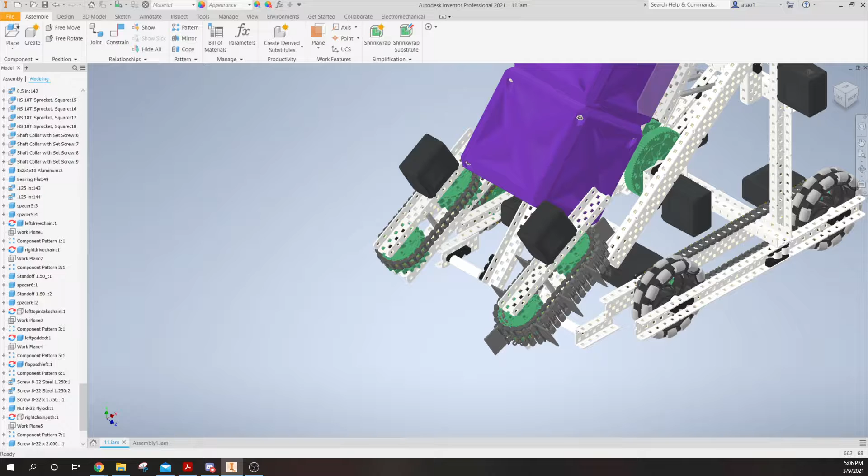Right, so today our objective, we're going to finish the other side of the intakes first. That'll take roughly 10 to 15 minutes. So we'll get started. First we want to make a part.

So right chain, and then we can start the drawing where we want it to be, on this surface, because we're putting it on these sprockets. So that's what we want to do. Then you click Start 2D Sketch and click the correct plane that we want to draw on. So this one.

Okay, and then we remember that we have to do project geometry and construction lines to get the centers of these two circles. So we can just do that. And then with these geometries established, we can draw directly on the CAD using those center points.

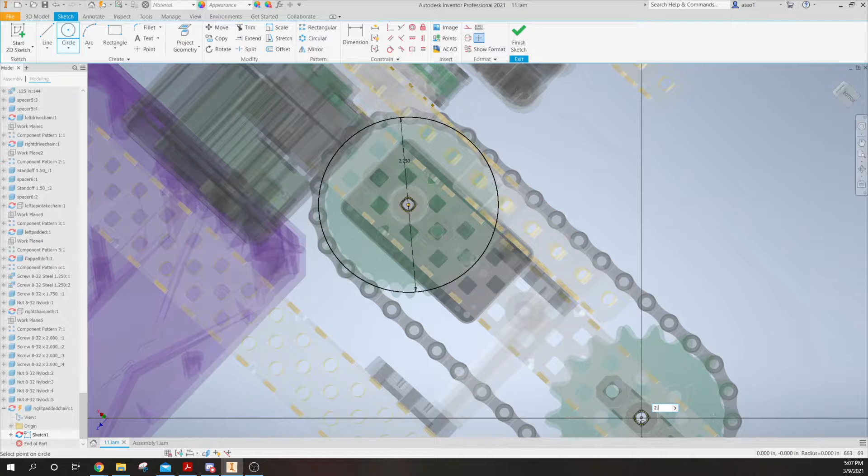And then we're basically trying to draw the chain path right now. So we need some sort of elliptical shape. So we're going to need two tangent lines across here. Notice how they're not tangent right now. That's because we're going to make them tangent by using the tangent tool here. So that's why it doesn't matter where you put the lines initially. And then finally you trim off these ends, so you just click on trim and trim these off.

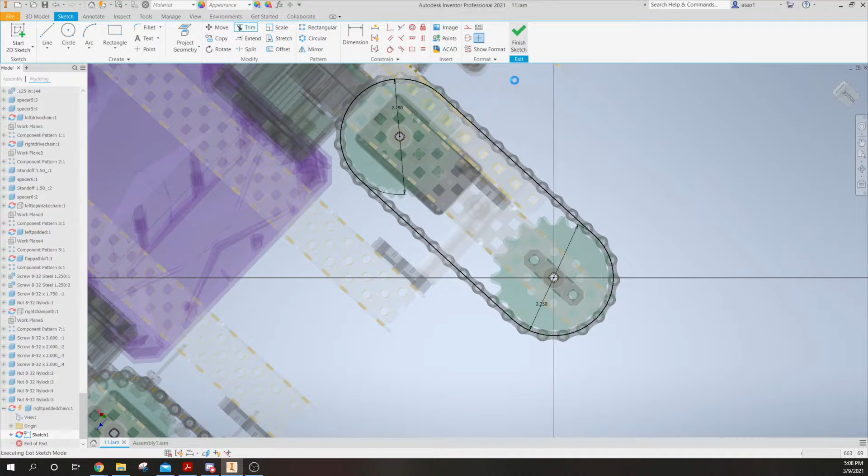Alright, then you want to add a work point, right. So we can start one right here. Actually, no, I don't like that. We're going to start one right here.

Right, and then we're going to pattern this around the chain. So we click on this point, click on this, and then select curve length, which is the length of the curve, and you divide it by 0.386, which is the length of each individual chain. And then we click these two radio buttons and apply. We see that our work point gets patterned nicely across the whole entire chain.

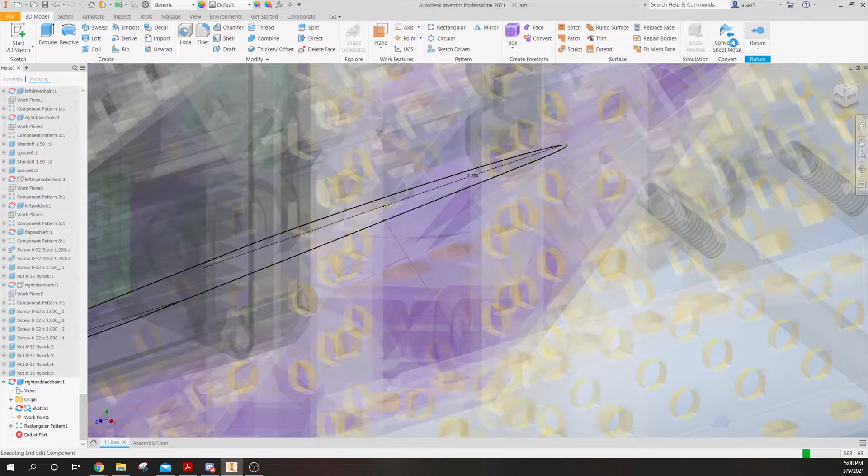And then we're going to turn the sketch back on because we're going to need it later. So with that done, we can first CAD the padded tank treads, which are these things, these links with pads on them. Not the flaps, we're going to do that right after.

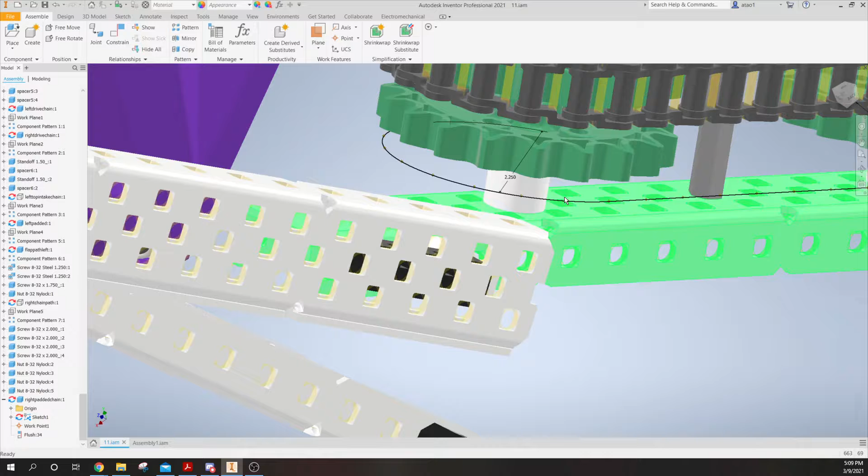Okay, so we're going to remember where our point was, which is about somewhere here, okay. And now we want to bring in a padded tank tread. So, chain and tank tread traction link. They're also called traction links because they have pads on the surface that grip surfaces really well. And this is exactly what we need.

We need to make a plane here so we have a surface to constrain everything to, or all the chain links rather. And we're going to use this plane right now. So if we go into the part in the bottom left here, we can click on origin and choose the XY plane and constrain it to the work plane we just made so that it's nice and in line.

Right, hello. And then we're going to have to constrain this padded link to our first point. So we're going to click on, oh wait, these are the old links, my bad, okay. We're actually going to use a link from the new library. I used my old library. So we're going to use library 1.2 because they have something counted for us that's useful.

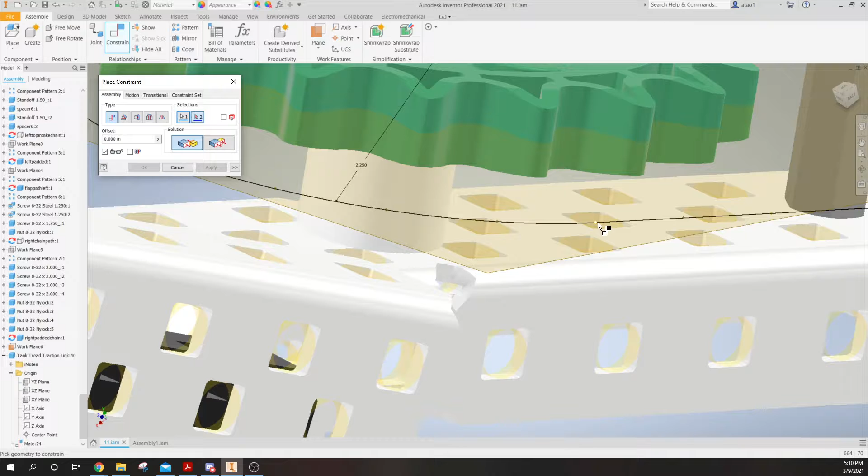So if we go here, you find the exact same things. They have this little orange thing going through the middle, which is important for our second constraint. So I'm just going to redo the first constraint. Boom. And then we need this axis, and we need to constrain it to the first point that we made here. And then you click apply, and then your chain link's kind of like this.

We need one more constraint. We need to align it with the chain path. So you click the XZ plane and the chain path, and then you set it to either 90 or negative 90. You're going to have to try both. And if it's wrong, like this one, you just switch it to the other one. So you can edit the constraint down here, and boom.

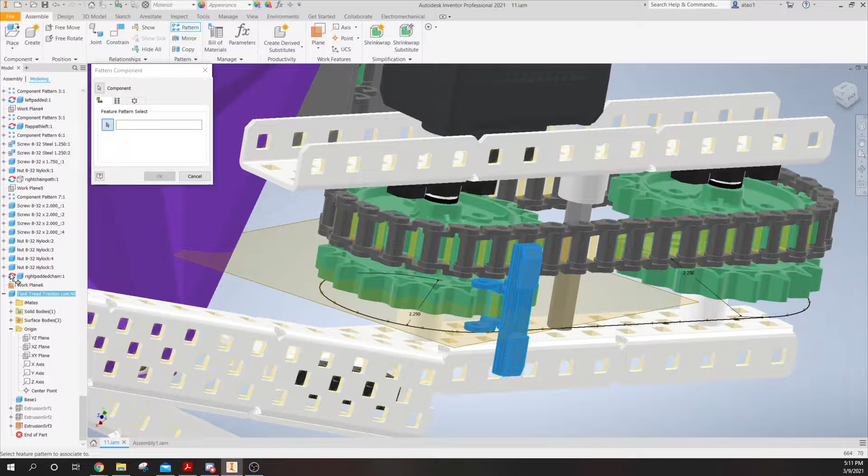And if everything's done properly, it should pattern itself nicely around the whole chain once you click on pattern components and you click on the feature pattern. I'm going a bit fast because it's covered last week and we have some other things to cover today as well. So yeah, and then we need to find the path which we made in right padded chain, and boom, if we click it, you see how it patterns itself really nicely around.

This is exactly how you would do it in real life as well. So if you're building this in real life, this is how your rollers would look. And now let's get rid of all these sketches with all those numbers so it'll look nicer. So yeah, that's the padded stuff.

Now, what about these flaps? We're going to have to add those in somehow. So let's do that right now. In principle, it's literally the exact same process, except notice how they're all spaced out a little bit more. That means we have to specify some different numbers, but all in all, it's pretty much the same.

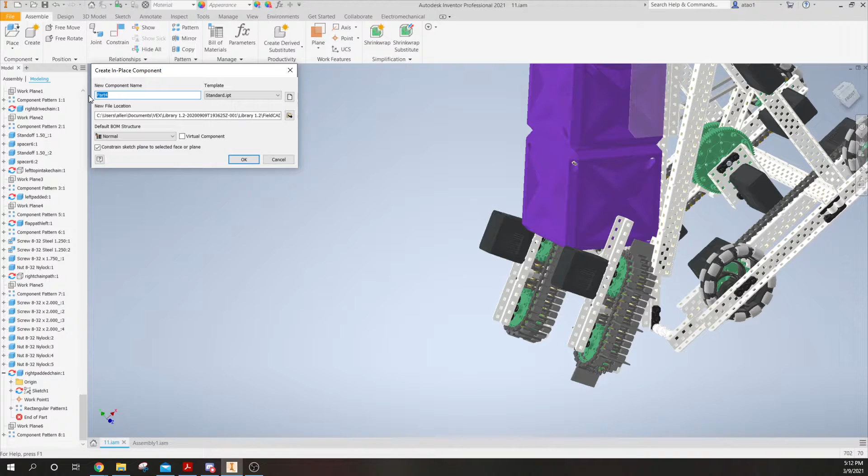So we're going to name this right flap path, I guess, and do exactly what we just did before with a small twist. So we go to the surface we want, start 2D sketch, and find the correct plane.

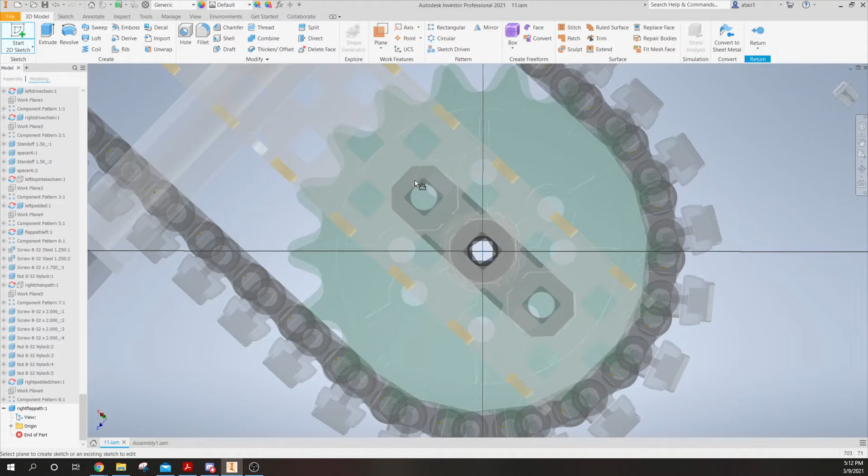Now we're going to do the same thing: project geometry, construction lines, and we're going to find the center points of both sprockets. And then turn off construction lines so we can draw in our circles.

The circles are roughly just the size of the teeth, or goes right between here, so you can really just guesstimate that. If you're guessing a bit too big or too small, it really doesn't matter, because in Inventor, chain is probably like 50% aesthetics, 50% function.

Personally, when I make CADs, that's why I do chain at the very last, so my renders will look realistic and pretty. But if I'm gauging clearances, I don't need chain to do that because the sprockets already tell me that. So this is why we do this at the end.

Now we have the path sketched out. We just use the point. We're gonna start it where we started it before. So here. And then we're going to pattern it around.

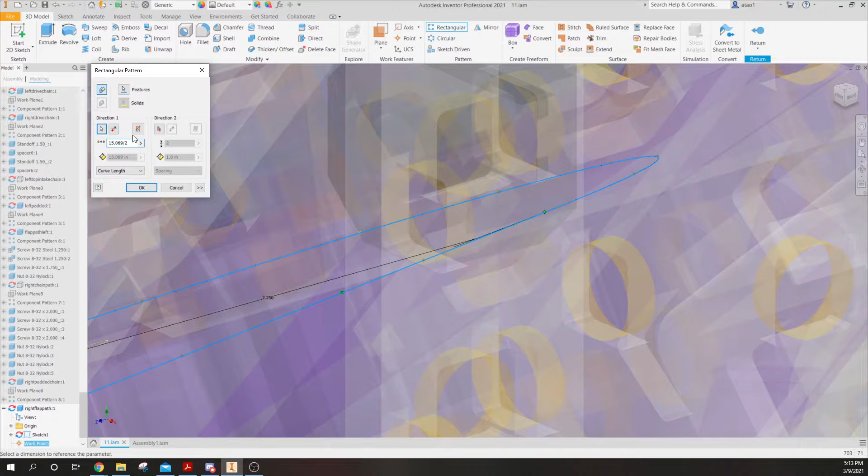This is the only difference, essentially, between what we did like 5 minutes ago and what we're doing now. We click on the point, we click on the direction and curve length, and this is the only difference. We're going to make the spacing, we're not going to divide this by 0.36, but 2 instead, because we want it to be spaced further apart, since these are the flaps, not the padded treads. That's the only difference, and we can apply that.

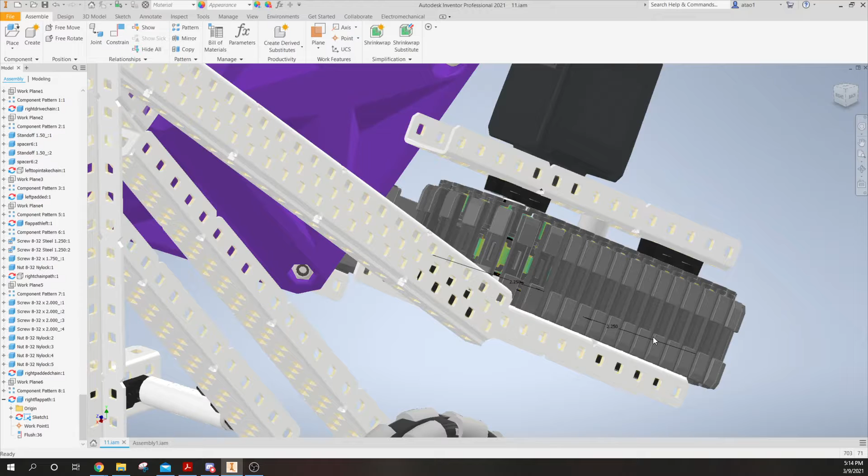And now we have to bring in the flaps. There's 3 types of flaps that come with VEX. You can choose which one you want to use depending on what you're using it for. There's short flaps, medium flaps, and tall flaps. It depends on your application.

On this robot, you probably want to run medium flaps because the larger the flaps are, the more reach in the front, right? Because these are further out, they can reach the cubes better. So if they're not perfectly aligned, they have more tolerance, which is really good in driving and programming because it's more tolerant of error. So we're going to choose medium flaps.

You see the short flaps are a lot shorter, tall flaps are a lot bigger. The reason why we typically don't run tall flaps is the more friction surface you have, the more strain you put on these motors. And typically when you have tall flaps, that means you likely stall your intakes out, which is never a good thing.

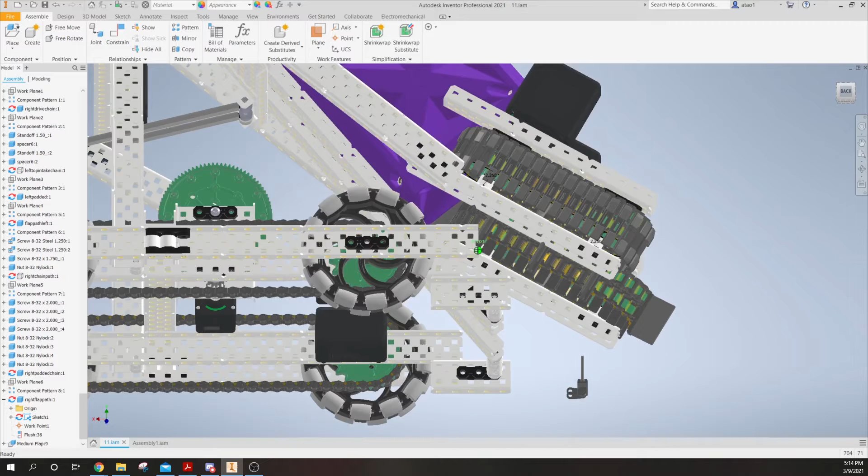Okay, so if you recall, the last thing we did here was we had to make a work plane. That basically gauges the center of the sprocket there. And then we're ready to constrain this flap.

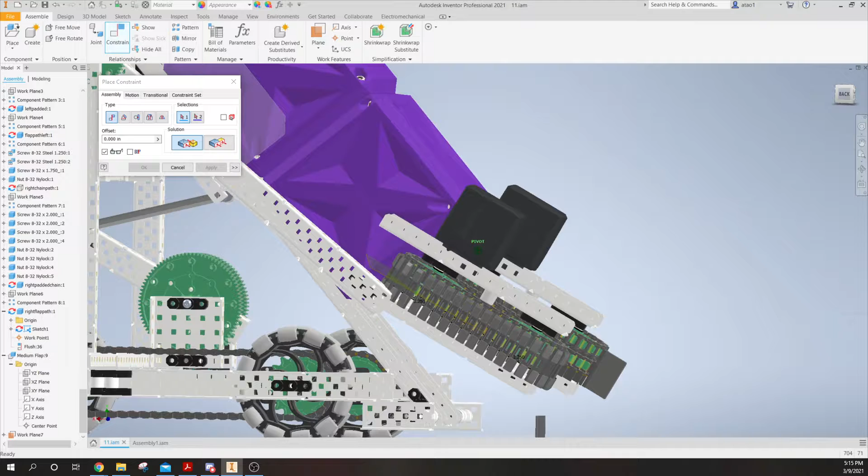So, right, we constrain the... okay, we need to choose the right plane. I believe it's the XY plane.

Right, and then we constrain to here. Notice how it's off-center because for some reason the designers of these parts in CAD made it all the way up here instead of to the center. But it's okay, we can get around that by just applying an offset here. And I find that 1/2 inch works nicely, so boom.

And then we're going to have to constrain the second constraint, which is the axis here, so this thing. And then we have to constrain it onto the first point we drew. That's actually important. If you don't constrain to the first point you drew, bad things could happen.

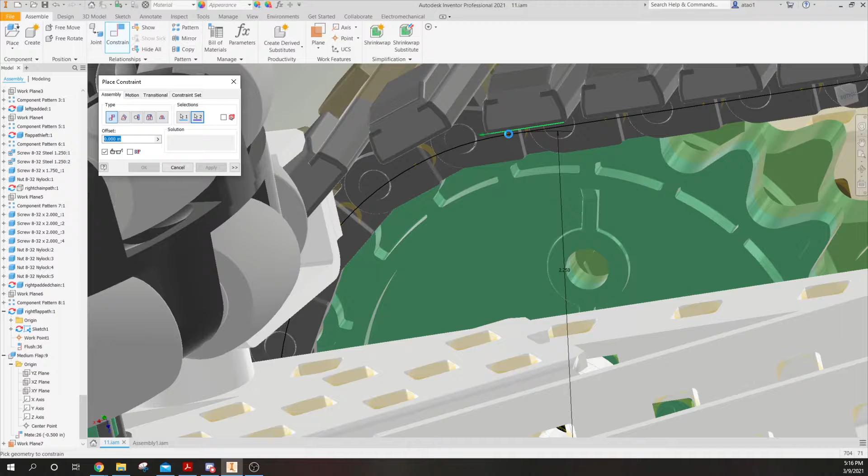This is actually kind of hard to access because we already constrained a layer on it, but I'm pretty sure it's this point. Oh, clicked the wrong thing. Okay, we need to find that flap again.

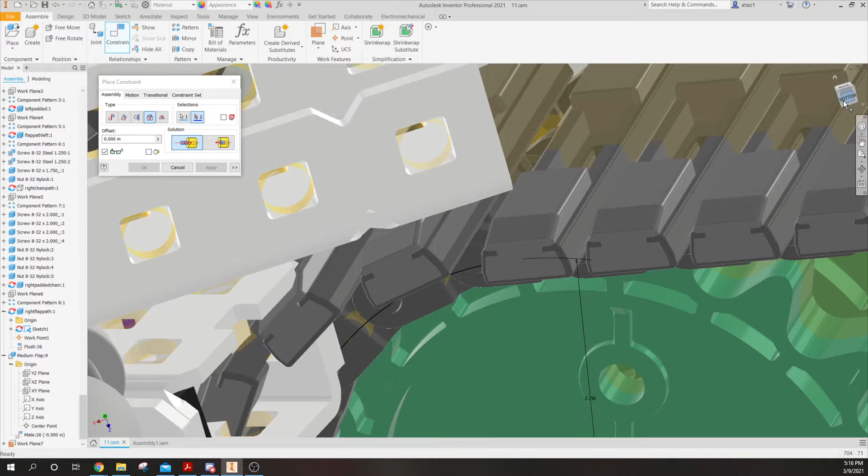Is that the right point? No. Okay, that's the right point, and then we have to find the first point we drew, the first work point, which is...

It's not letting me hover over it because I'm using the wrong constraint. So this one, and then apply, and you see it puts itself here. And now we just have to apply the final constraint, which is the angle constraint.

We constrain whatever this plane is with this, and we want it to be at 90 degrees, right? And then we choose this, boom, and you see it's in the right direction, so we don't need to flip it to -90. So now we have one link done.

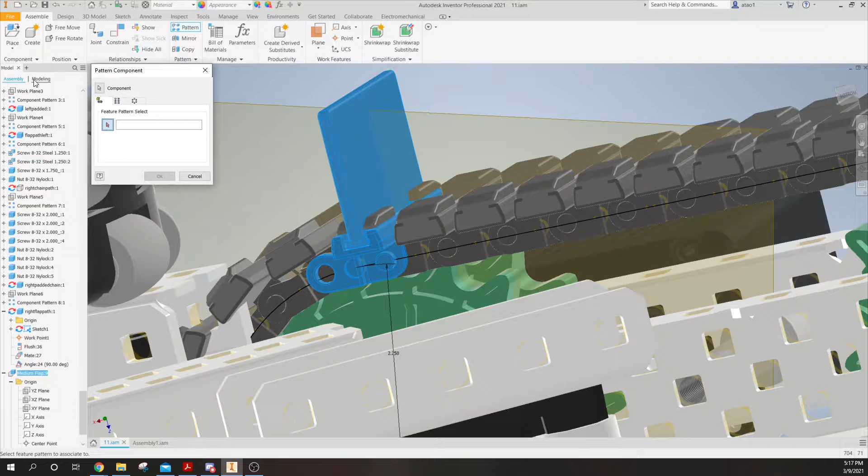We use the path we made to pattern it around. So we click on the thing we want to pattern, just like before, go into modeling here and go to the rectangular pattern we made. And you can see when I click it, it patterns itself nicely around the intakes, which is really cool and really satisfying.

With that done, we just turn off the helpers that we made, so the sketch in the plane, so it looks nice. And that's our intakes done.

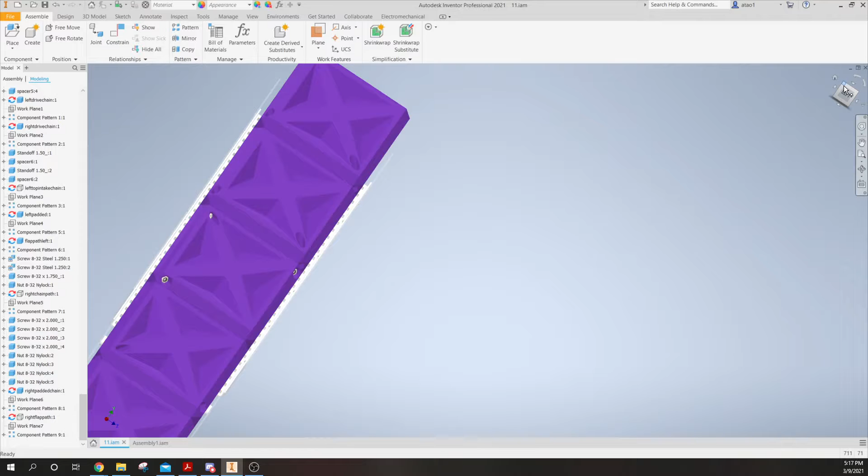And yes, this is exactly how they would look in real life. These intakes are, I guess, 2 ways to call them, like they're meta intakes. Meta means like the design most people are going after, like 90% of the teams.

A word of advice if you guys are competing in Vex next year, when you're designing your own robots and competing, don't - crazy ideas are called crazy for a reason. Typically, especially your first year, you want to build something that's meta, like what everyone's doing. Well, you might be worrying, oh, it's not unique, it's not going to look good to the judges, whatever. But typically, things are meta for a reason - they're simple, they're reliable, and they're probably the most efficient concepts.

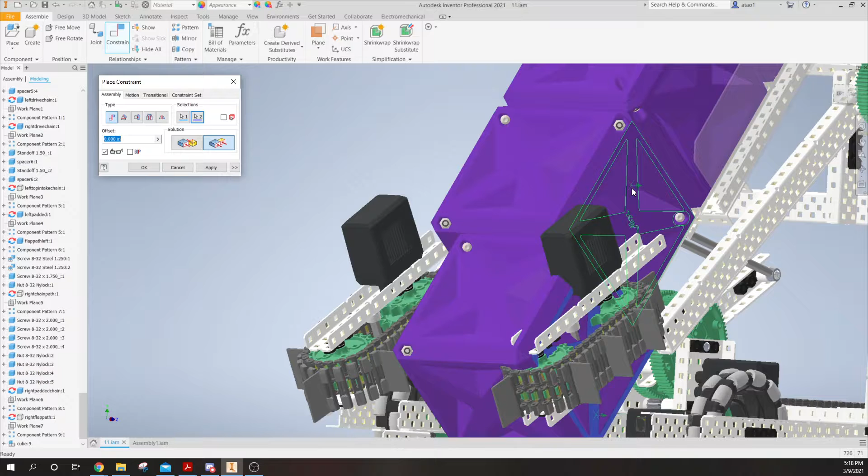So if you find yourself building a robot that's really similar to other teams or whatever, although it's not the best feeling, there's nothing wrong with building something similar. But don't just flat out copy them. That's pretty bad. Then the robotics loses its point, right? You're doing robotics to learn and because you're interested in it, not to copy other robots.

What I'm trying to say is sticking to the design everyone else is doing is perfectly fine, and that's certainly a mistake that I made in the past, which I still regret last season.

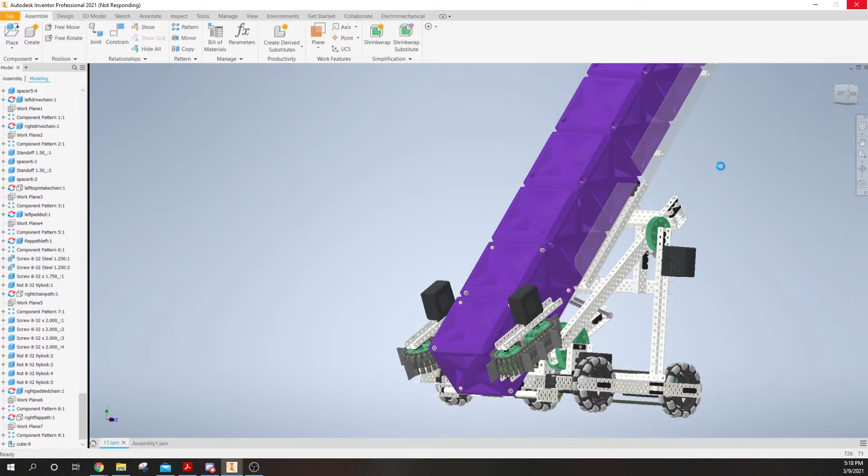But yeah, Inventor is loading. After a few seconds, it should respond again. Oh god. Did my Inventor crash? Yeah, that's why you save your work periodically.

Thank god it didn't crash. Okay, so we're gonna save this immediately.

It's taking a while to load. Also, on a side note, if you guys have opened Inventor recently, you might have errors, like saying it can't find your license, or it's reporting to Autodesk. What you do, Inventor actually had an update, like 2021.1 or something - you just want to update it to that, and you'll be fine. You also want to update the licensing service, which you'd find in the Autodesk desktop app. You can just search it up on your computer in the search bar, and you should be fine.

Alright, so there we have it. Nice. Okay, so the robot is technically functionally complete. There's one small detail that I would like to add.

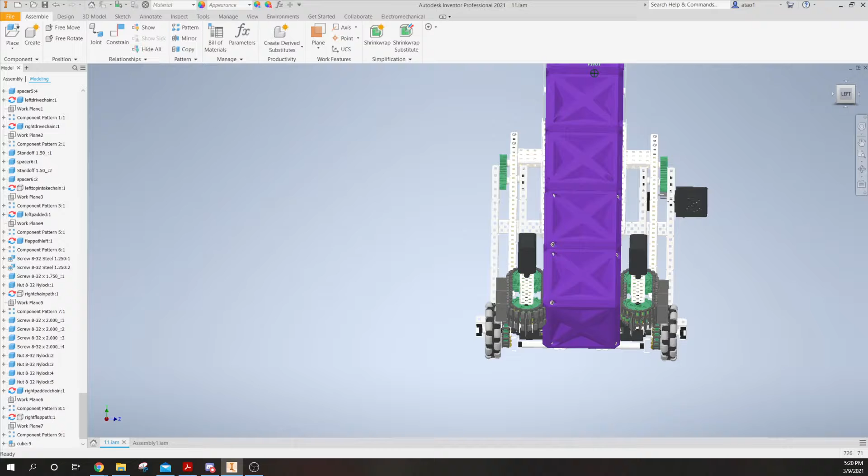One issue that a lot of teams have, especially early season, is you see how there's a big gap between the intake flaps and here. So you might be wondering what stops the cubes from being misaligned here. Let me just show this to you.

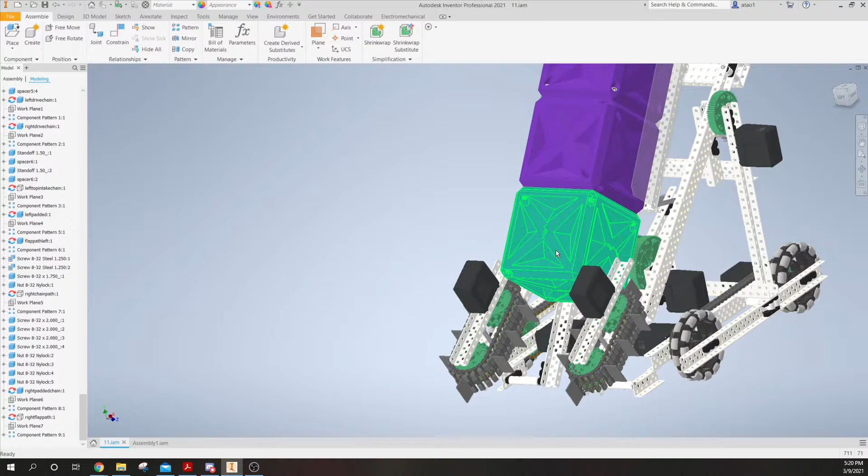So if we take away this cube, a common issue that plagued a lot of teams was this. Alright, so since there's nothing guarding the cubes here, what stops the cubes from, while being intaken, being misaligned like this and consequently jamming against here, right?

So you want to build some sort of guard that guides it in this empty space here, and that's really easy to do. Most teams just attach it to the intakes, which we're going to be doing right here. I want these cubes back.

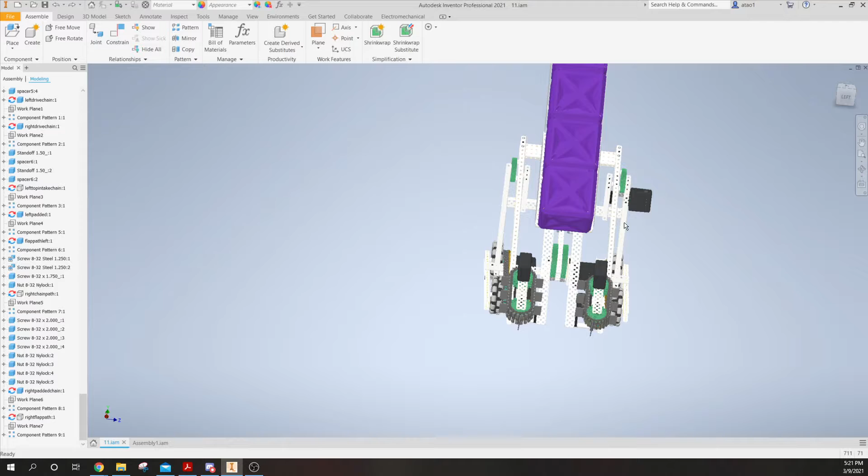I guess not. Alright. Right, if it doesn't want to give me my cubes back, I'll just constrain it myself. So that's just really going to need 2 small pieces of plastic.

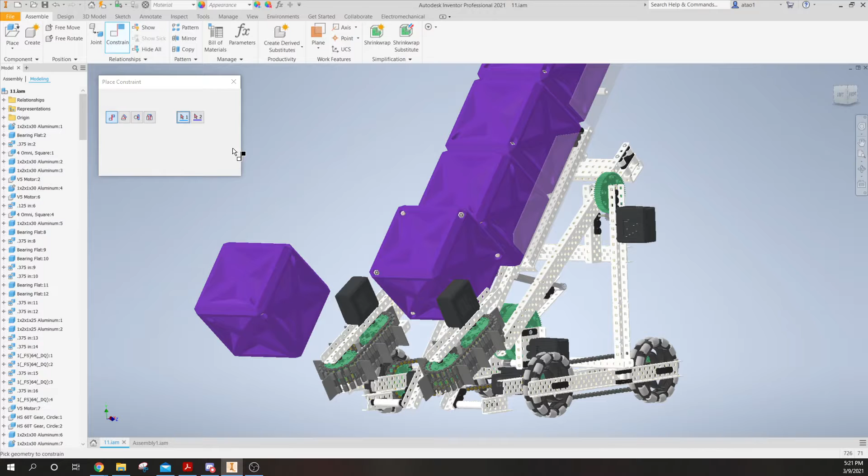I guess that's a good refresher for making custom pieces in Inventor, which is really half the purpose why Inventor is here, not only in Vex but real life, so you can make nice custom components. We don't have 3D printers, and that's not legal in Vex, but this is why we use CAD software. But that being said, there's still ways to manufacture your own custom pieces without 3D printers or laser cutters that we've done before. We'll probably cover that in a later meeting, when we're talking about advanced build quality or something.

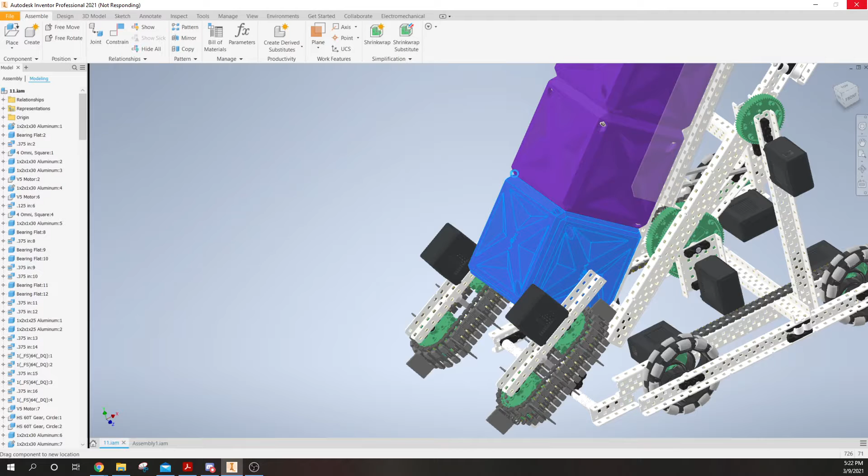Okay, we're just going to put these cubes back. And we're going to put on the 2 small plastic pieces. So you see, when we add chain constraints, for example, these are really complicated constraints. When you start adding them, you might find that Inventor starts becoming really slow. So that's why you always want to do these constraints near the end. I'm not going to add another cube because I don't want to make this more complicated than it needs to be. So we'll add it at the very end.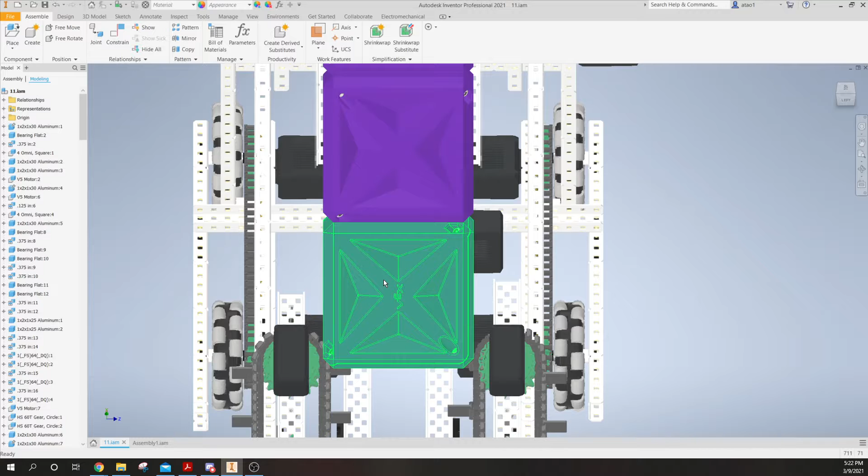All right, so going with our idea, we're going to add small plastic tabs here. Another issue is when there's no cubes here and the cubes in the tray are free falling down, they might get misaligned here as well in the intake. So it might be diagonally shifted. To prevent that, we can use the guards here as well. You'll see in a moment. It gets pretty intuitive. Okay, so how should we do this? I guess I'll draw what I mean.

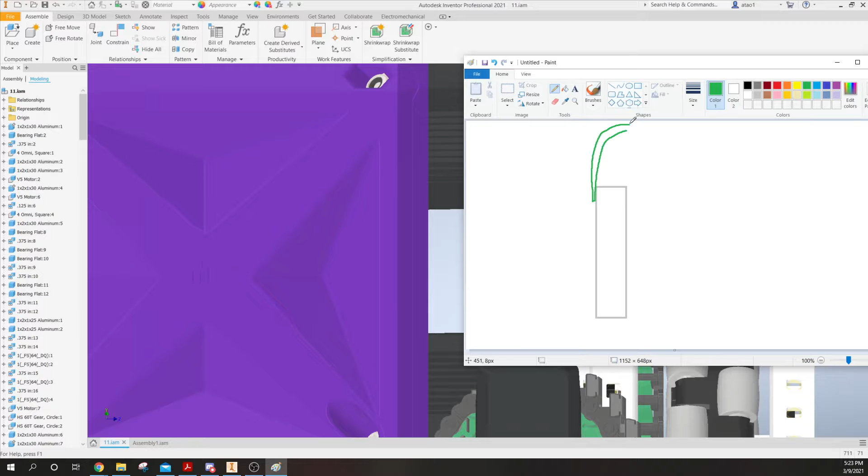So basically we have our intakes here, right? So this is the metal C channel here. We want some sort of guard in this area. So what a team called 7K did, they basically had a nice piece of plastic that went like this, if I remember correctly, kind of bent like this. So that means the cubes will be guided straight upwards. And when you're spinning the intakes outwards, the cubes would autocorrect against the smooth surface here as well, which is really nice. So that's the type of thing that I'm trying to do here.

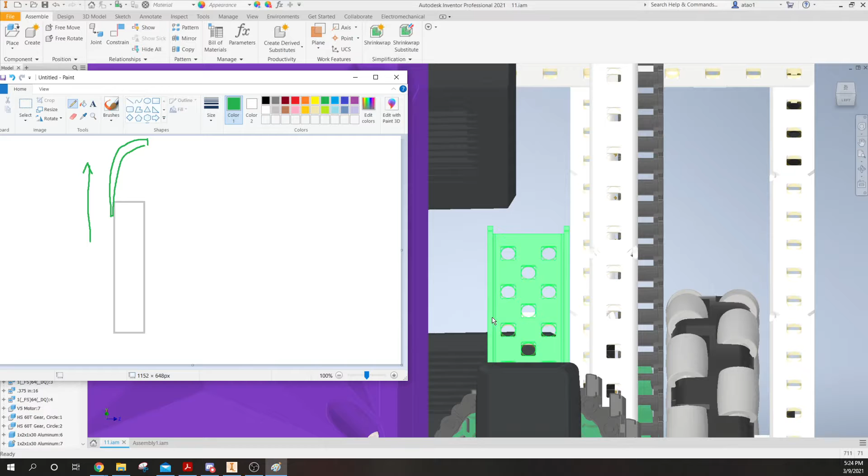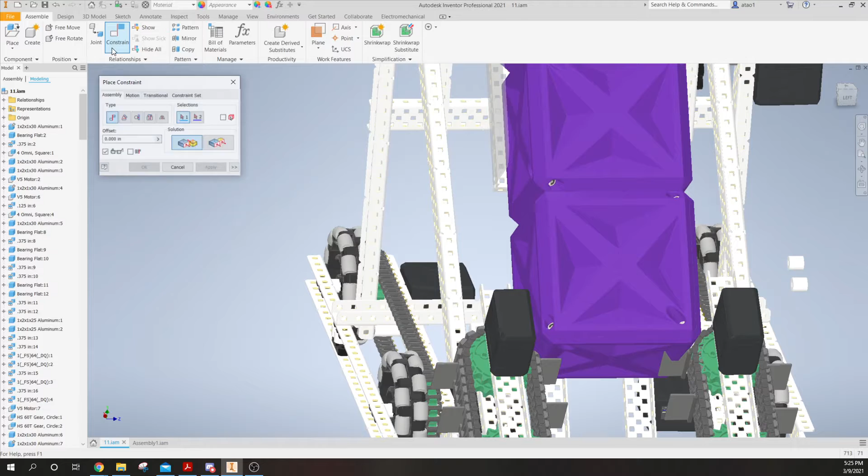To actually sketch this is going to be quite tricky. Well, let's do it this way. Instead of using plastic, I'm going to use aluminum bars. At that point, I think it's just a matter of preference, but in Inventor it's easier. So that's what we'll do. I'm going to save it again so I won't lose my work. All right, so we're going to grab a spacer here. Actually, no, these spacers are better. This part is actually really simple to build, so that's nice, and the robot's almost done.

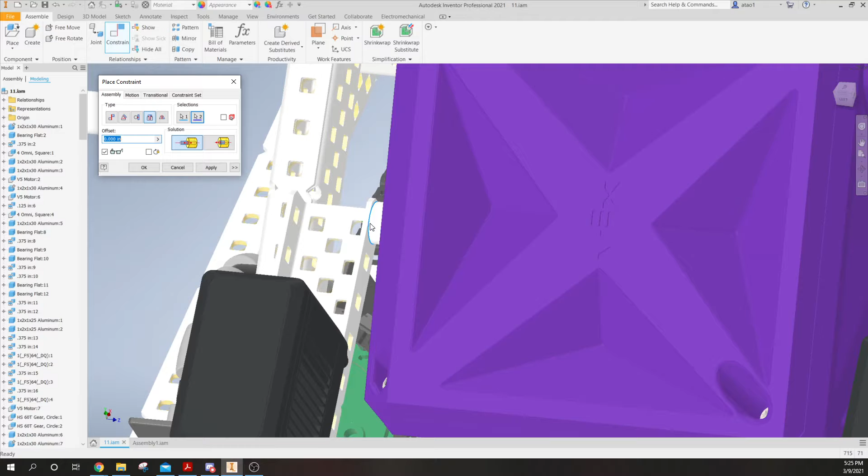Maybe we'll mount the brain as well if we have time at the end. The brain is basically the central processing unit of the whole robot. It's where you upload your code and tell the robot what to do, and it's directly connected to the lithium battery, which powers the whole robot.

You might be wondering, lithium batteries, can't you make bombs out of those? The answer is yes, but please don't. So that's that.

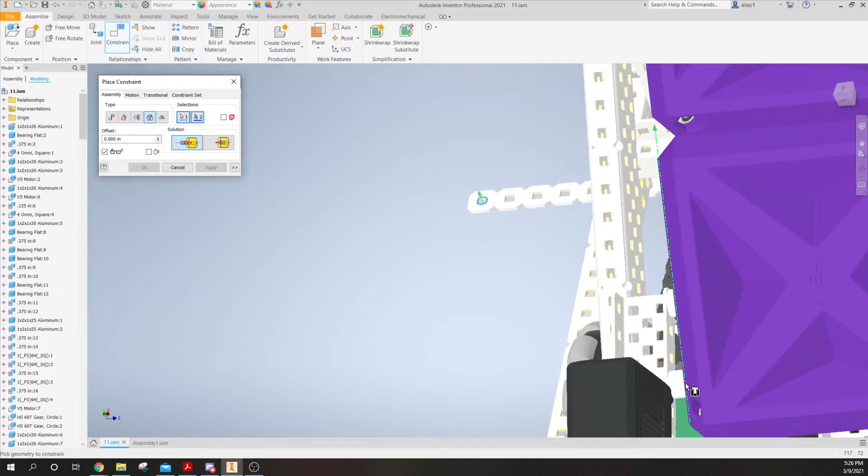Alright, so we're probably gonna need 7 hole, 8 hole long, so let's grab 8 holes. Alright. I believe I showed you guys how to bend parts in our flywheel video, so I'm gonna run through this kind of quickly. If you want a refresher, just look up our flywheel shooting mechanism video. We bent a piece of metal there, a plate. Here we're bending bars, but it's literally the exact same thing. Oh god. It's lagging again.

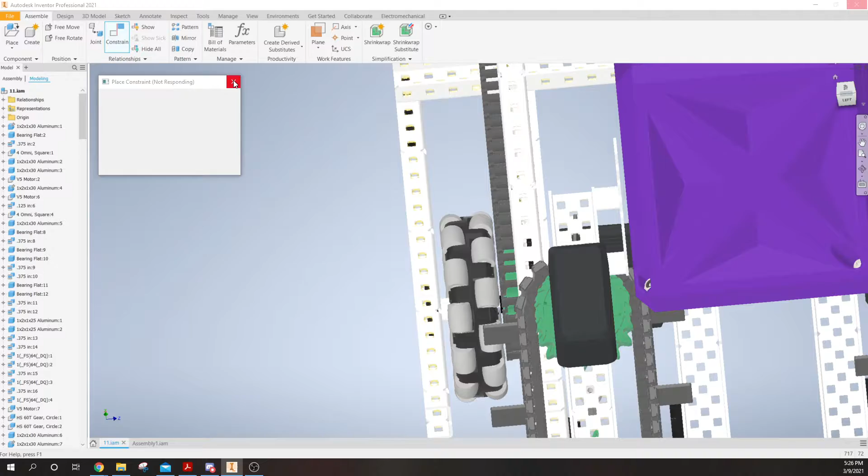Okay, I'm gonna restart Inventor. Give me 2 seconds. It's usually not this bad. I have a feeling it's because I layered chain on top of chain on the intakes. So typically you do them right before you render, but in this case we just have a few more things to add. Alright.

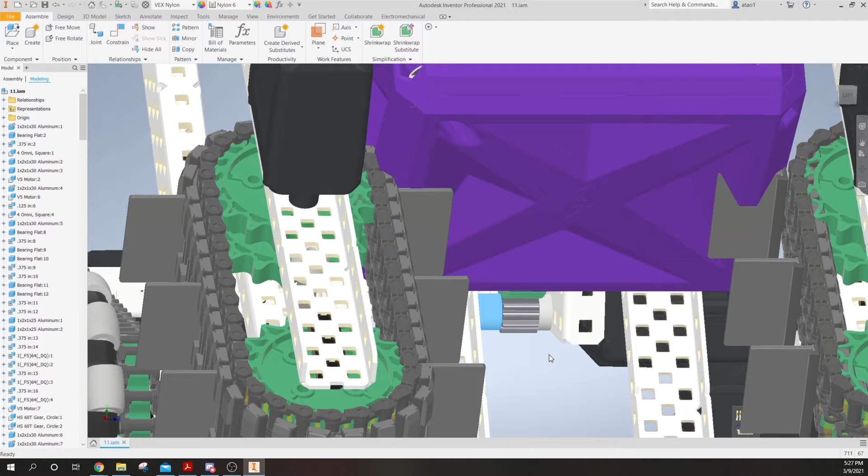Alright, we're back. Nice. I just remembered something. But first we're going to return to where we left off. So this is exactly why you save your work. If we didn't save, oh boy. That's unlucky. So we just really need to put these 4 spacers back on.

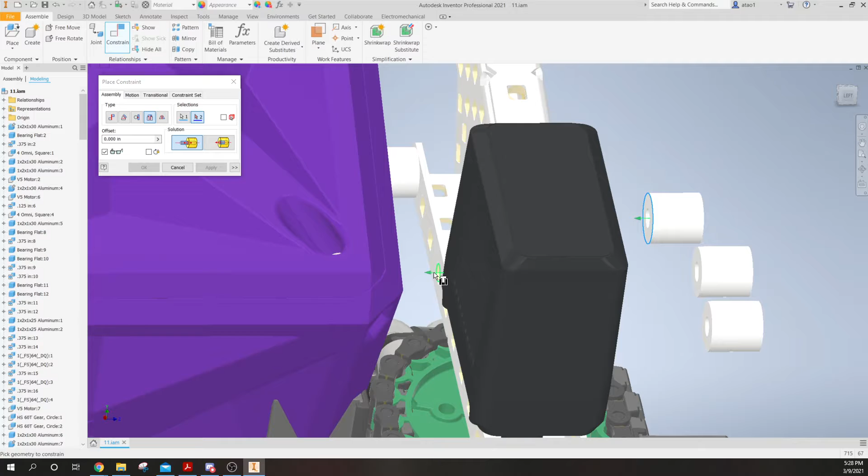Because the chain added so much complexity, I'm thinking about not mounting the brain. I'm just trying to keep this assembly as simple as possible in case you guys want a copy of it, so it doesn't die on your computer. Alright, so we're going to put this here. Now we're going to grab our bars again. So again, we want it kind of like here. I actually think 10s might work better, so we'll use 10s.

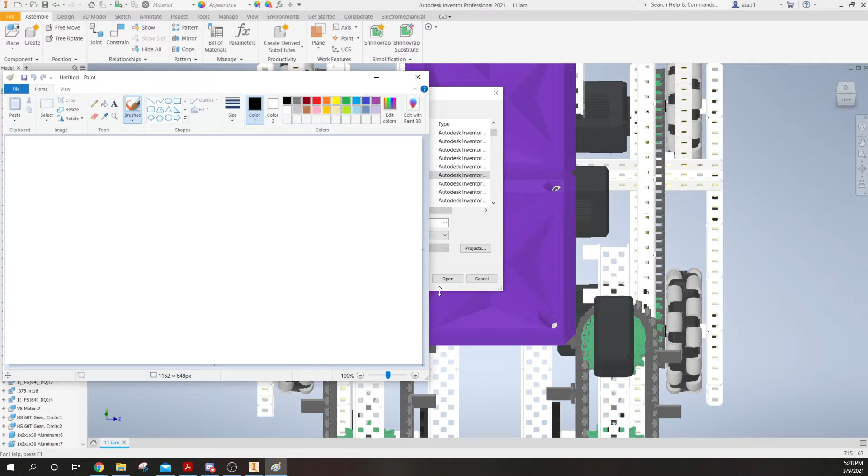Okay, here's an important note, so make sure you know this while you're CADing. Once you go here, VEX plate, oh, it doesn't even give 10s. Okay, we'll use 9s then. So because we're bending one part like, let me draw this, because we're bending one part like this and the other part like this, whenever you modify one part, as long as all the parts are the same, it'll modify that part as well.

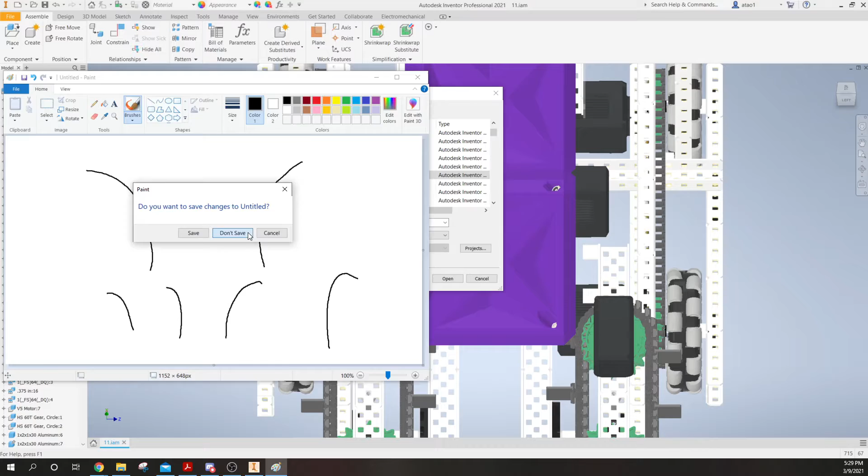So if we use the same part in the Inventor library, if we bend one, the second one will automatically be like this. And if we bend the other one back, it'll turn into like this. We want them to be different. What this means is we're going to have to make a copy here. And it's perfectly fine to do this in your libraries, by the way, because you're the only one using them. So we go like this.

You see how we have a 1x9 plate copy? These are going to be 2 separate parts now. So that's really nice. That means we can bend them in 2 different ways. And we can just smack them on here. Okay, goddammit. Inventor doesn't let you rotate when you have a lot of parts. So we're going to use free move up here. It's usually not this glitchy.

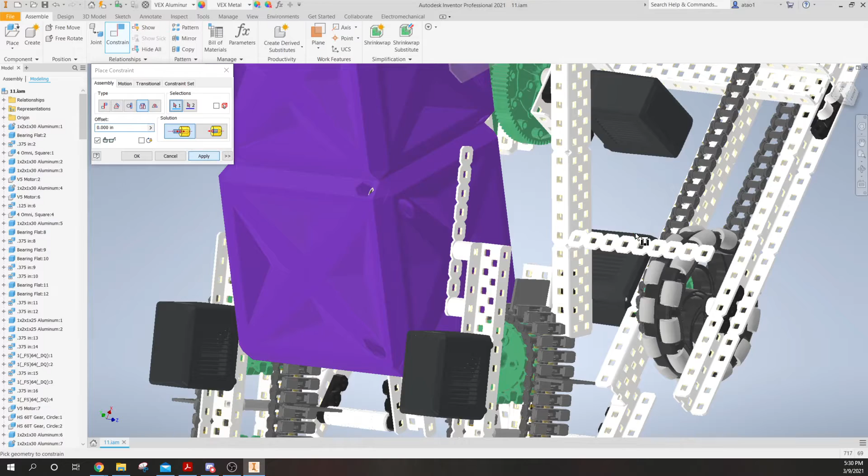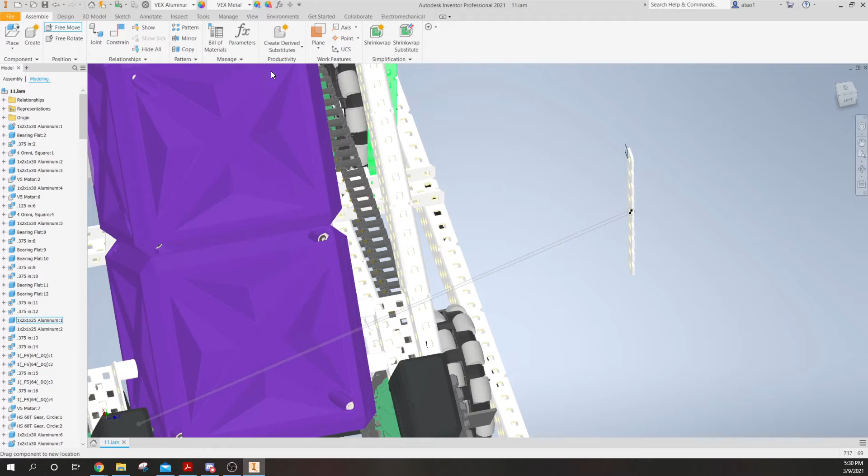It's a matter of habit. It's going to be tedious at first. It might mean that a CAD you worked really hard on for like a month, you might have to restart because you had broken assemblies. That's just life. And then once you get used to it, you can really just CAD like I am right now. So there's definitely a learning curve.

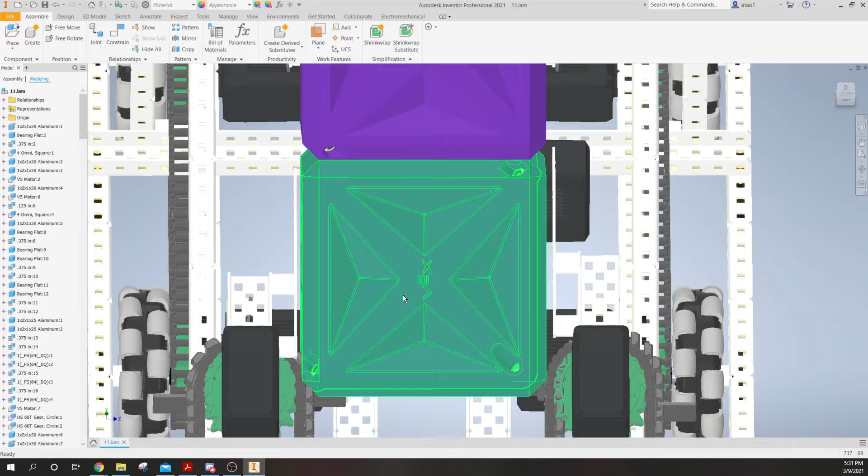Right, now we're gonna have to bend this metal. One is longer than the other. That's very interesting. I thought they were both 9s. Oh, because my perspective is whack. No, one is longer. Oh, because the C channels are not symmetrical. That's very interesting. Right, so this C channel seems to be 1 hole longer. Never noticed that, but that's okay. We're just gonna shift all this down then.

You might be wondering, in real life, if the C channels are not perfectly even, like this is slightly longer than this, would it matter? If everything clears, the doctrine here is if it works, right? If it works, then you can keep it, probably no big deal.

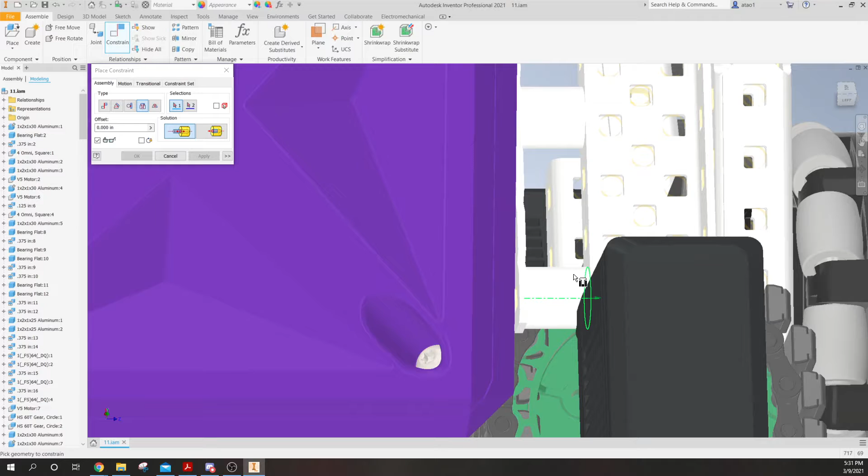But if you really want your stuff to be even and have aesthetic value, like you're more of, what do you call it, form over function, I guess. More of a form over function person, then keeping it even will be a lot better aesthetically. Personally, I try to keep all my things even because it just bothers me to look at this, but it's okay. This is CAD, so.

Alright, now we have to bend these. Pretty simple. You double click on the part, start 2D sketch here, and we just have to draw the bend line. We're going to bend it about here. So you can literally just draw an arbitrary line here. And since I want this to be consistent on both sides, I'm going to make a dimension and throw in some random value.

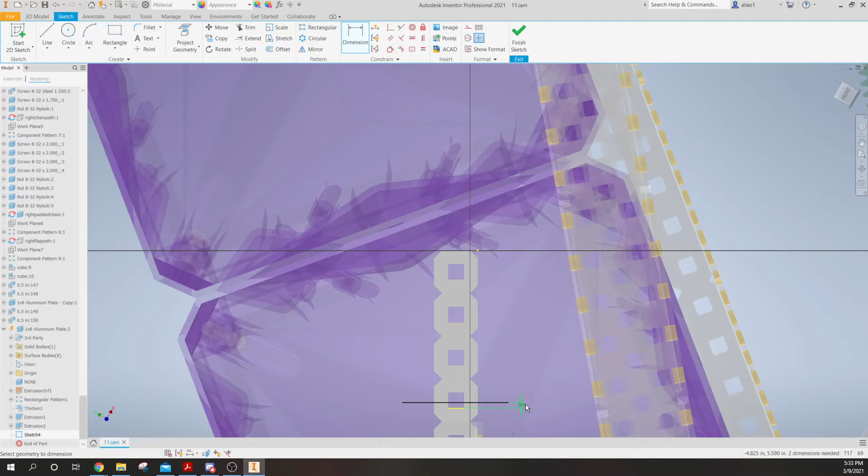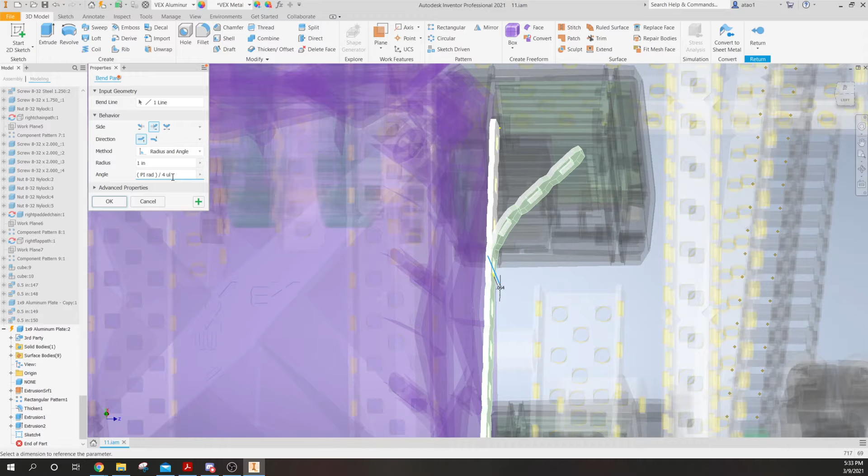And then we click on bend part, which is down here, bend part. You click on the bending line and Inventor does all the dirty work for you. So like this, that's a bit too much, so we want to change this. It's in radians. I don't remember why it's in radians, but that's not a big issue. It looks like I have to put in the exact units. Okay. That looks a lot better, so we're just gonna keep this. I'm gonna save this for the other side.

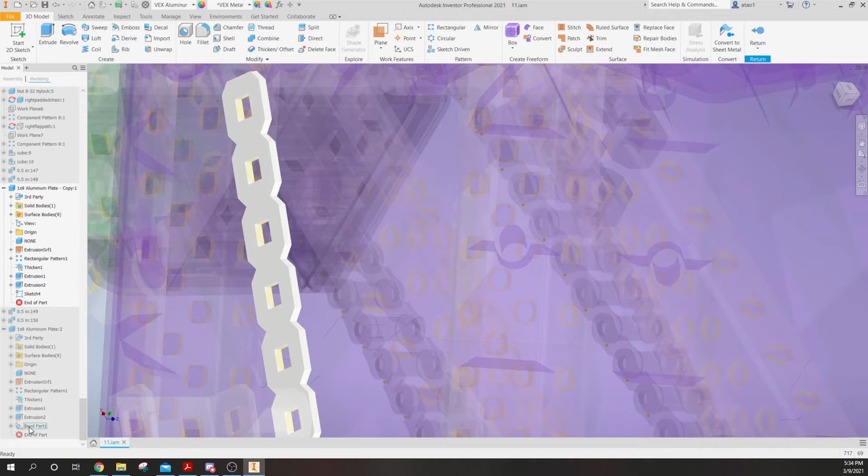Alright, so this is kind of the idea that I was talking about. And you can notice how since the two bars are different parts, this bar is not affected. So now we just simply do this to this part. Start 2D sketch. Okay, I remember I did it on the third hole. Or like the fourth hole. I think I did it on the fourth hole then. Right, so did I start a 2D sketch? Yes, I did. Okay, so if you want to go back and edit a sketch, or I'm just gonna make a new one. Can't find it. It's totally fine. And we need to draw a line, so

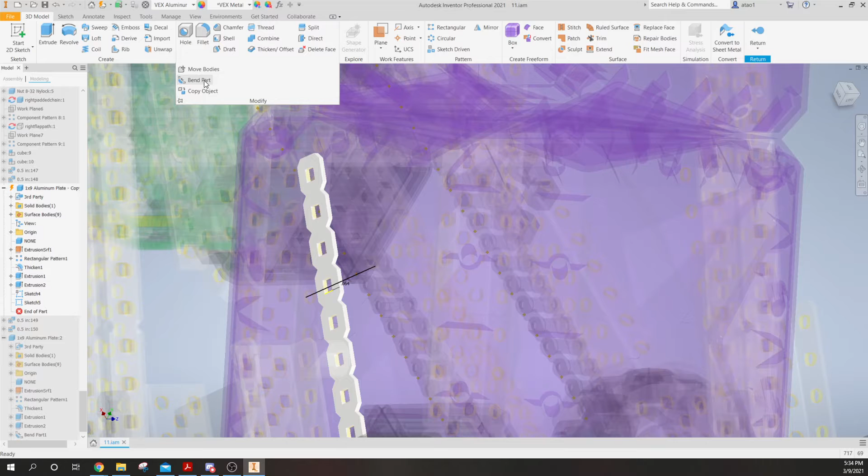boom. And to ensure consistency on both sides, we're gonna make this 0.064 as well. Well, why did I choose that number? Well, it's arbitrary, but it also happens to be the thickness of metal and the thickness of Lexan or custom plastic that you can buy. So it's a handy number to have in your head. Alright, you can see how this part is not guarded and the gap between here and here is greatly minimized. I think that looks pretty good, so I'm gonna save. Nice, okay.

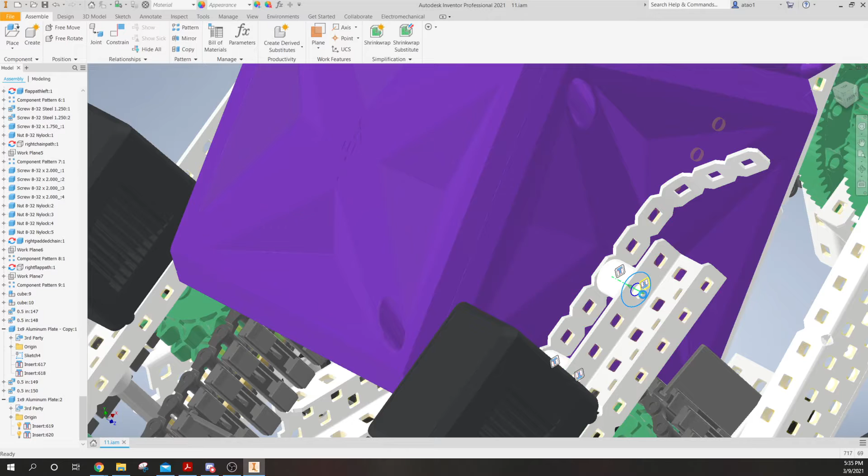Right, okay, you know why it's offset? Because this is constrained like this and this is constrained like this. Let's just fix this right now. It literally takes 2 seconds. And after that, I think we can basically call it. And next week is going to be rendering, which is going to be a lot of fun. Rendering, depending on your computer, might take like overnight, or maybe just an hour or two. It really depends on your CPU. Inventor really likes CPU. Inventor's performance depends on your CPU mainly. So depending on your CPU's performance, renders can take from 1 hour to overnight.

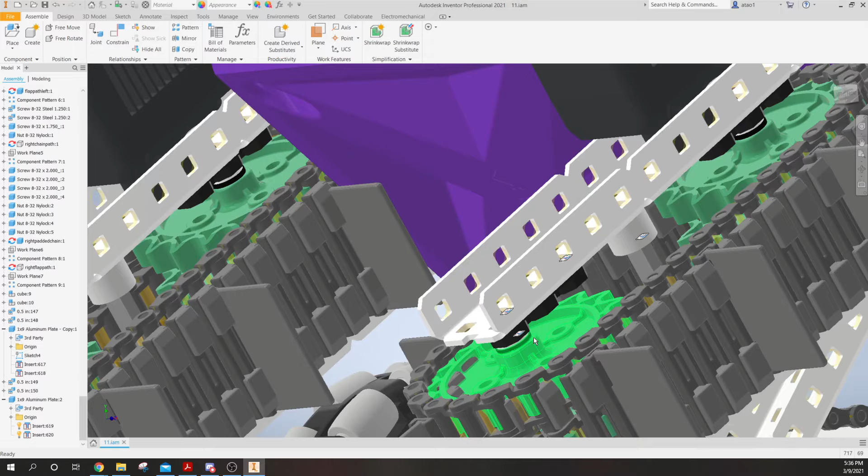Typically I like to do my renders overnight because maximum quality and I'm not using the computer for anything else. Unless it's like before a test or something. So overnight is usually pretty nice. And yeah, there's also different ways you can render. You can ray trace, which basically, I forget the exact point of ray tracing, but essentially it makes the lighting look a lot better, I'm pretty sure. And you also have normal rendering by iteration, and it's just a different way of rendering. Ultimately, just choose which one floats your boat. For me, I like ray tracing, but it's not a huge difference.

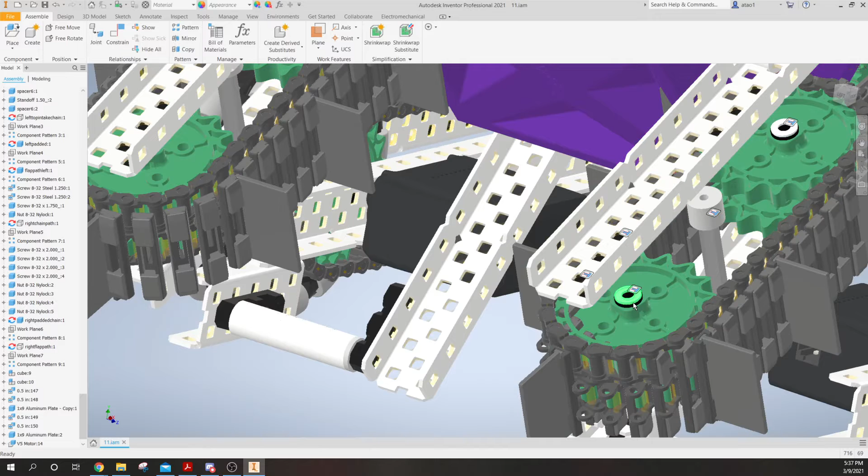The motor is mounted one hole down as well. Okay, it's pretty easy to fix. Why do we use small washers here? Because the inserts, like the square inserts, are made of metal. And if you look at the C channels, they're made of metal as well. And when you have metal rubbing against metal, as you can imagine, there's a lot of friction. This is why we like to use washers between two metal surfaces.

Yeah, that's no problem. See ya, have a good day.

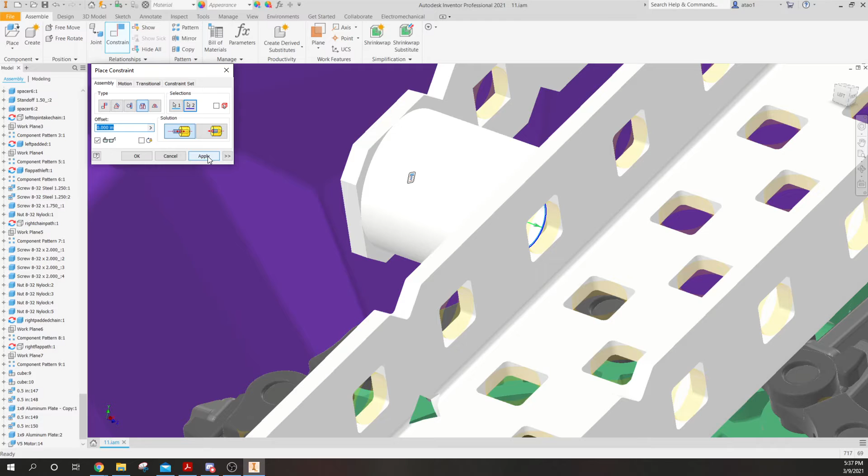Alright, so now we just smack the motor back on. So this will probably take like 5 more minutes since people have to go eat dinner and whatnot. So we're almost finished. Okay, motor goes here. Wrong way. Nah, I did the constraint wrong. Okay. This is probably the final piece we need to put down.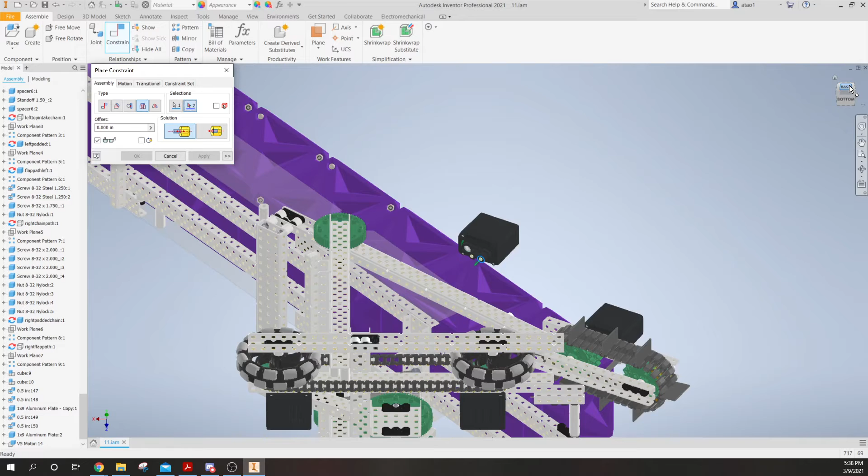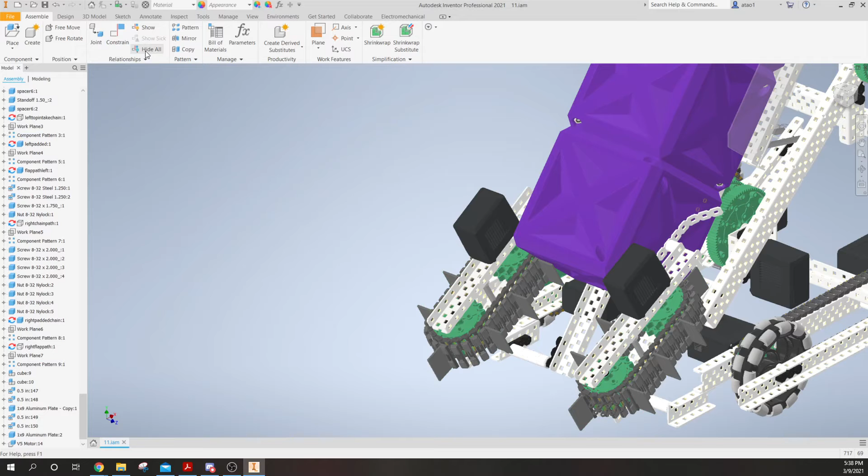So we're not putting the brain and the battery on the robot because one, it's pretty obvious where they go, at the back of the robot, and you have a lot of mounting space for it. So the necessity to CAD it is really quite minimal, but maybe I'll do it after the meeting or something. We'll see. It makes the robot look more realistic anyway. And two, because adding the flaps, like these chain assemblies, really increases the complexity of the model, and we had Inventor crash on us once already, so we don't want that happening again.

Okay, we're gonna save. I guess we have a few more minutes, so I'm just gonna show you guys what the brain and the battery is. The brain, the battery, and all your V5 electronics is the heart of every robot. So if you go into electronics, the V5 brain is this.

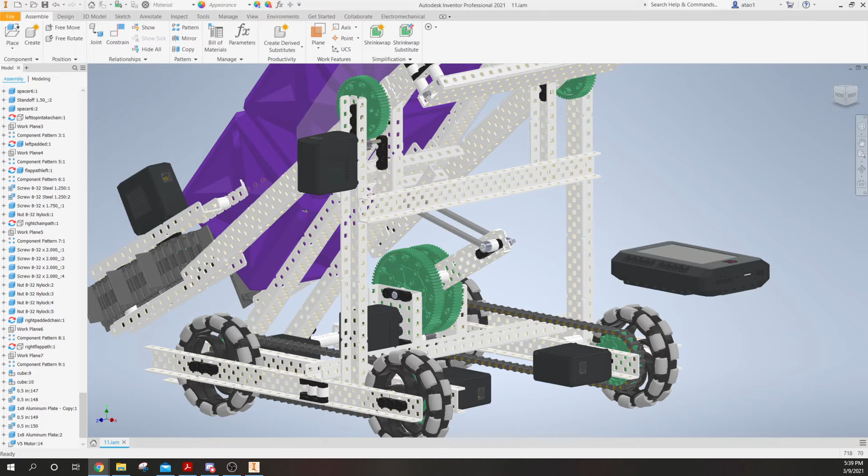So now, after Turning Point, which is the 2018-2019 game, we are all blessed with a new VEX control system, which has a touchscreen, has nice V5 ports similar to Lego EV3, and it's just a lot better than the previous system where you had spaghetti cables and it was just a huge mess. You guys are very lucky to have this system. This system is quite good.

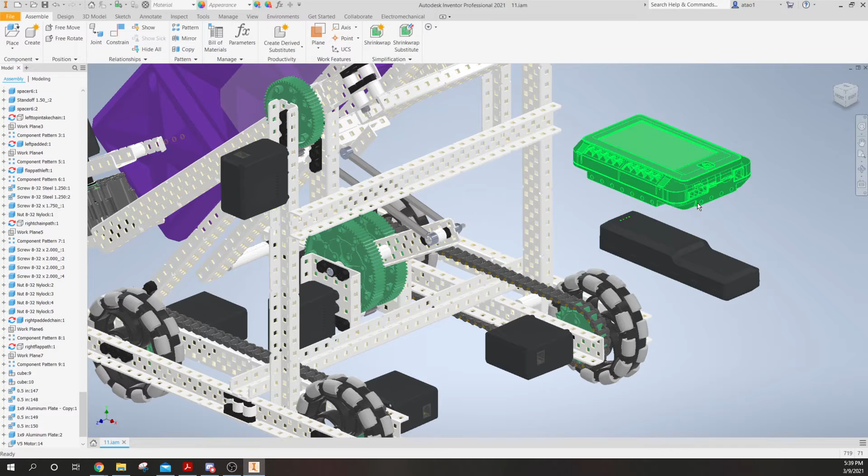In the early days, the ports really liked to die. Now it seems a lot better, so that's fine. That's the brain, nice touchscreen with like 21 V5 ports. This is a battery, lithium ion, I think, so pretty juicy. Yeah, don't do anything bad to it or else it will do bad things back, like overheat and blow up.

So yeah, and where will we mount these on a robot? You see how when we fold in, we just really can't. We just need to make sure this red area isn't taken up. So the edge of this wheel represents the furthest boundary where you can mount all your parts. So you can either mount your brain, or the robot brain rather.

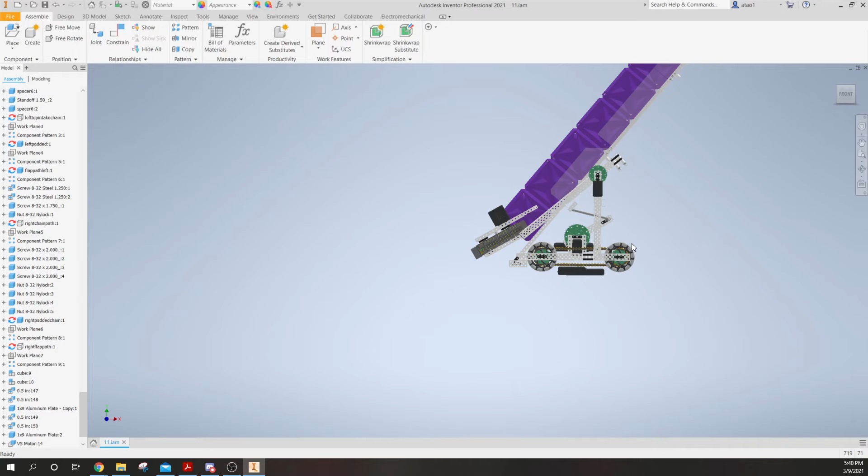Oh god, I clicked on the part. Whenever you click on a part and drag it, that's not supposed to be dragged, Inventor is really unhappy. You can either mount your brain here, horizontally, or here vertically. Just mount it in an area which is not going to get hit when other robots start ramming into you. Battery, similarly, I would mount it on this brace right here, so it's really accessible.

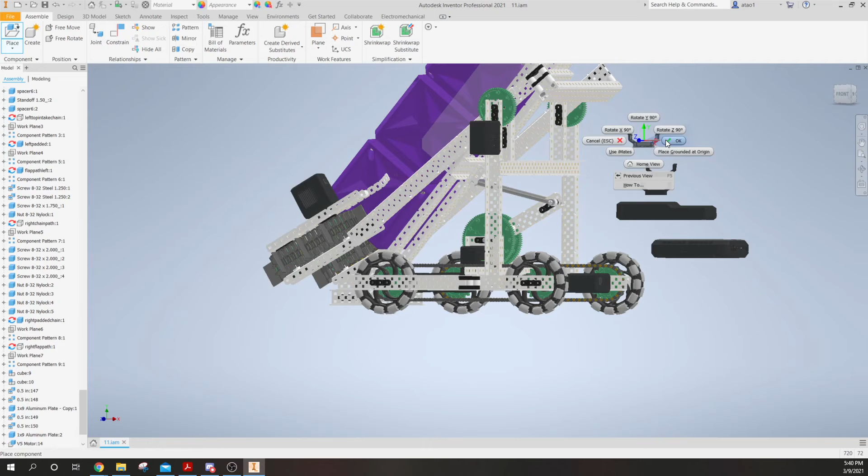Right. I can actually do that right now. It's going to take 2 minutes. So to mount the battery, you want battery clips, 2 of these, and then you want 1/2-inch spacers. These things. This takes 2 seconds to do, in real life and in CAD, so I'm just going to do it. It takes 2 seconds to do unless you have no more space left.

So typically when you're building, please don't leave this to the last moment. It's kind of like filling up a bucket with rocks. You always want to put the bigger rocks in first, and you put the little rocks in after. Same idea comes to building. You always want to make sure all your big parts clear, and then worry about the smaller parts. By big parts, I mean physically in size and in complexity and importance. So intakes are a top priority, for example, in Tower Takeover and in Change Up especially. And it applies in various other seasons as well.

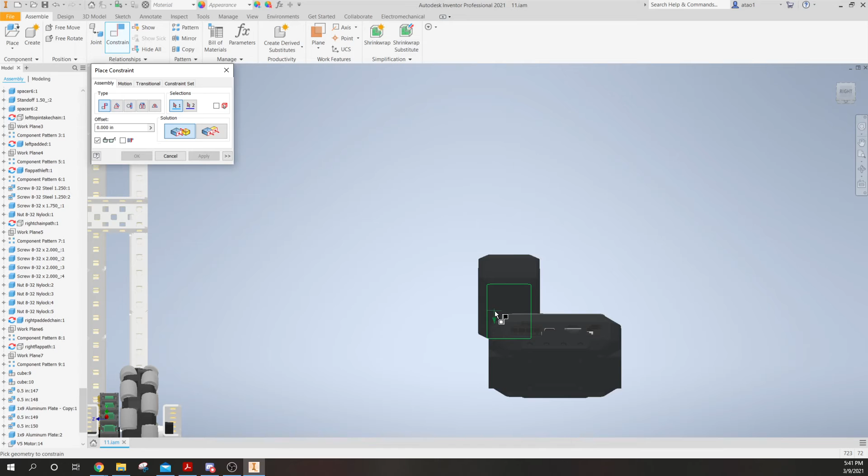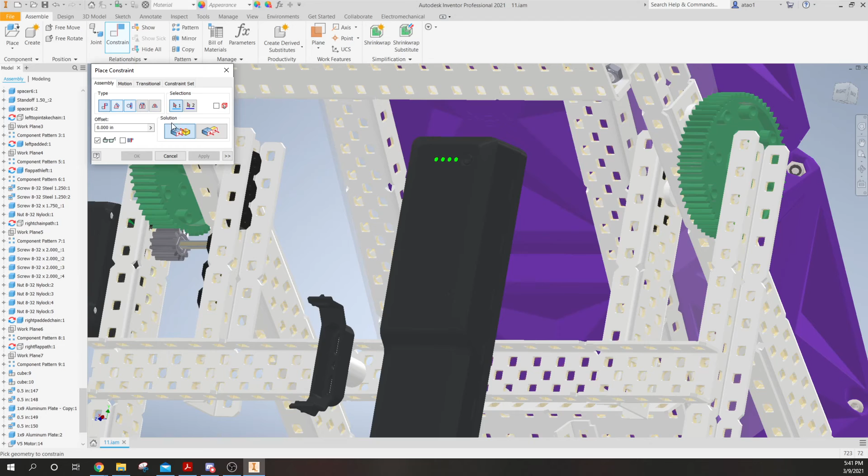Okay, now we just have to angle it 90 degrees, or rather 0 degrees. Yeah. Or the other way to do this is like this. So we're going to do this. And hopefully it'll cooperate, and no, it doesn't. Okay, I'm gonna angle constrain it first. I have a feeling it's because the surfaces on the battery aren't exactly straight. So we're just gonna do this first.

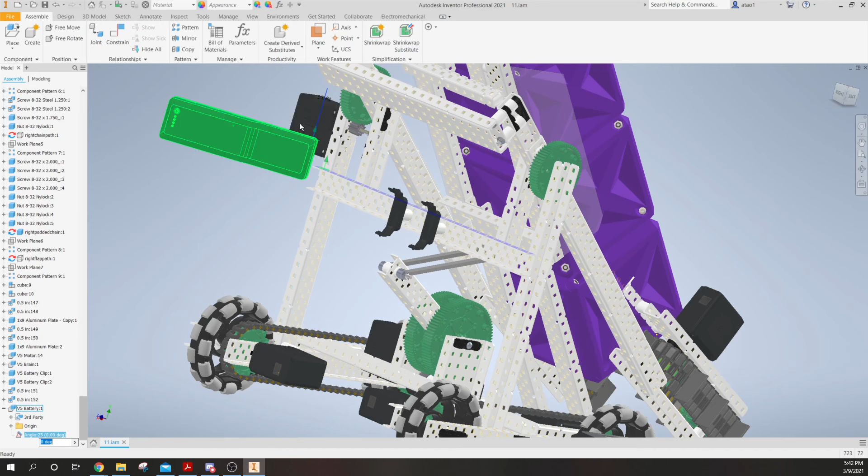After we mount this battery, I think it's good enough for today. So battery mounted at 90 degrees. Okay, that's not what 90 degrees looks like. We can just fix that really easily. 0, boom. Oh, it's angled really whack. Okay, that means this surface isn't perfectly horizontal. Okay, then the easy way to do this is this.

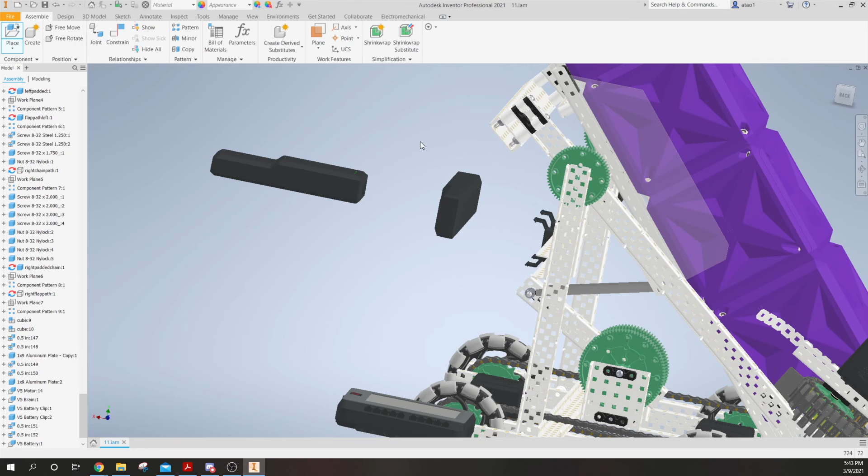So when you drag the part in, because we grounded our assembly directly in line with all these axes, you can just rotate the part until it's correctly oriented, and then you just use the mate constraint and mate it onto here.

And also, by the way, you're only allowed to have one battery on your robot. There's no way you can run 2 batteries with one brain anyways, but just keep that in mind. Only one set of V5 electronics for a robot. And that's how you would mount the battery. And yes, we have space for it, so it's super easy.

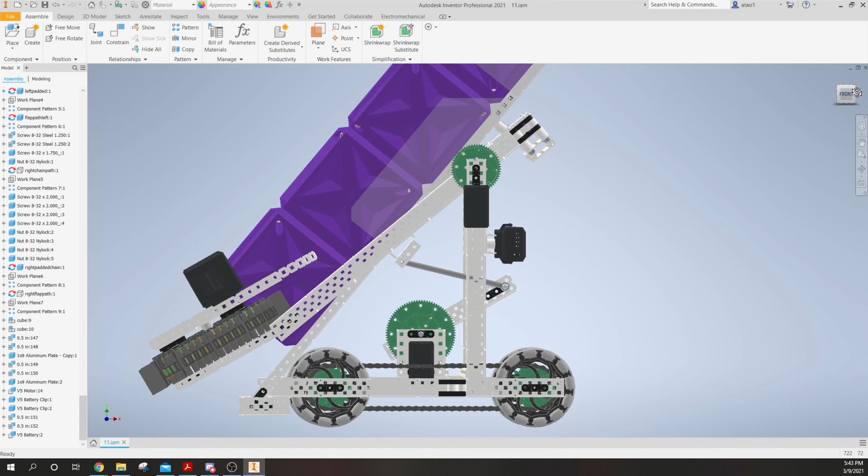Alright, so this is the robot. 9 cubes capacity, because one more cube would fit down here. If you want to have more, you can build an extension that we showed in a previous video. The L18s, for example, is a really good example. That's if you wanted 10 to 11 cubes. If you just took this robot, and I'm just gonna stop the recording now.